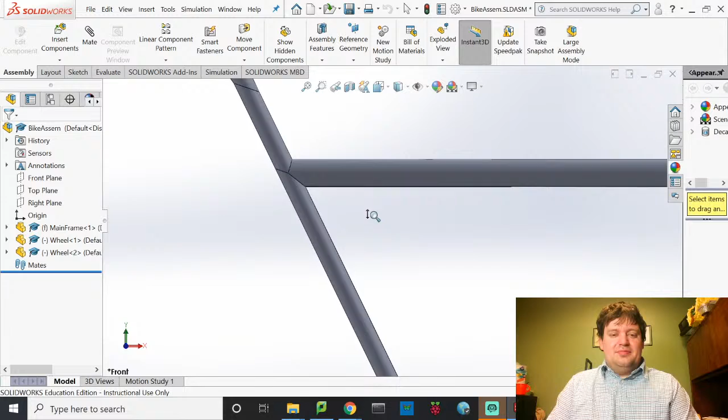Alright, in our last video, we started the design of putting together the final assembly of the bike. What you'll notice is that this doesn't quite look like a bike yet. I got my frame that I built, got my two wheels, and I did build a rear suspension in the last video. We're just going to keep going and trying to finish. We're going to connect this wheel today, and a lot of this is talking about different principles of assembly.

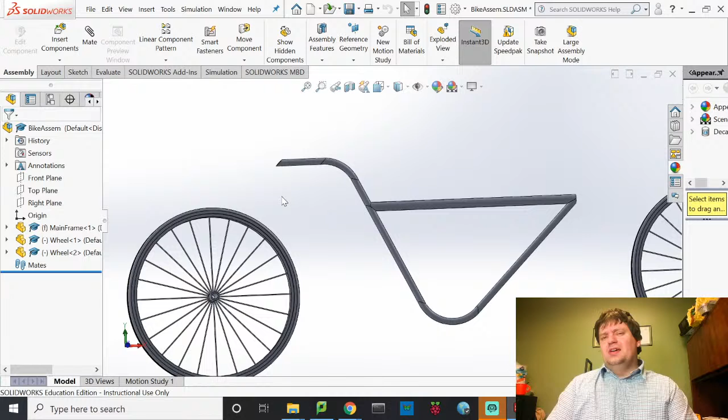When it comes to assembly in SolidWorks, there's a number of different ways that you can assemble things. You got to think about this like you were actually building a component. If you're going to build a component, in order to mount two things together, you would line up the bolt holes, and if they line up, you just let a bolt in. You would position it at a certain place and then clamp it on, maybe line things up and sandwich it between two other features, or slide it into a slot. You got to think about how things are assembled. The bolt holes are probably the simplest way to assemble things. It's what most people are used to. If you cut two holes in a component, you can align them very simply.

I did that a lot in the last video, and I also did a few other assembly techniques, like positioning a plate at a certain location. I positioned it, I think, 4 inches in from the end.

But when it comes to assembly as a whole, you always have to be thinking about how parts connect. One of the things I tell people very often in SolidWorks, and in design in general, is it's not hard to design a bar. I need something that goes from here to here. That's a bar, it can be square, it can be round, it can be whatever's available. That's not hard. The hard part comes in: how do I connect it? Connections are one of the most challenging parts of any design.

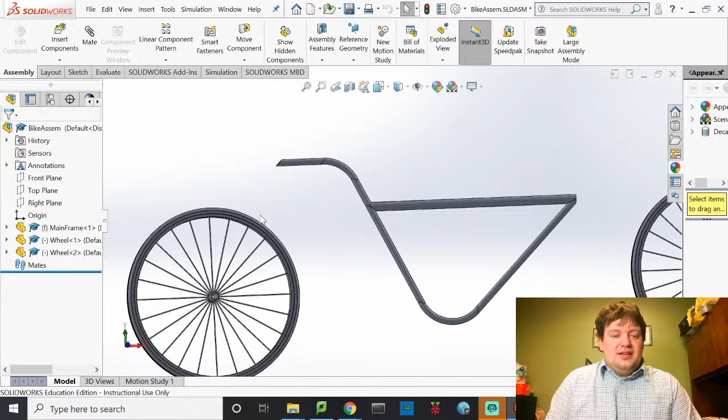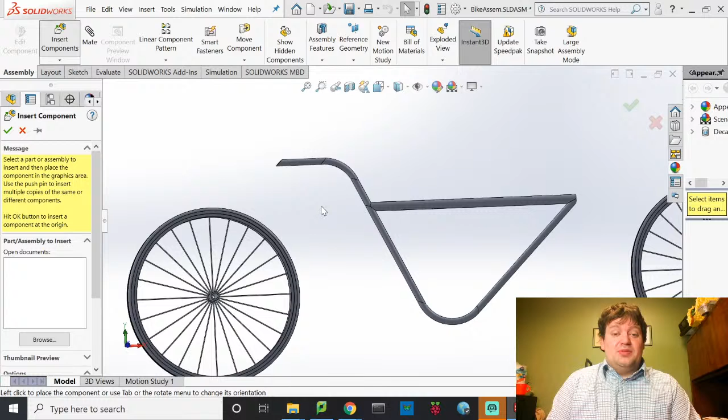So what I'm going to do is put my rear suspension in here, and I have a couple of different options for how I can include that rear suspension. Now, you'll notice last time we actually made all of these parts, but we also made this assembly file, which is the rear assembly file. Now, I'm in an assembly, but I can insert an assembly. This is now referred to as a sub-assembly, just by me putting it in here.

And you'll notice here's the center axle, and this is the axle that is used to rotate about, and this was my connection point that was going to go onto the frame itself. So what I'm going to do is mount that here, mount this piece here, and go through that process. So pretty simple, not terribly challenging.

You'll notice again that I do not have my temporary axes shown, so I won't be able to align my axes very well. So I go up to View, Hide/Show, and then go to Temporary Axes. This just allows me to see the axes so that I can get a better connection here.

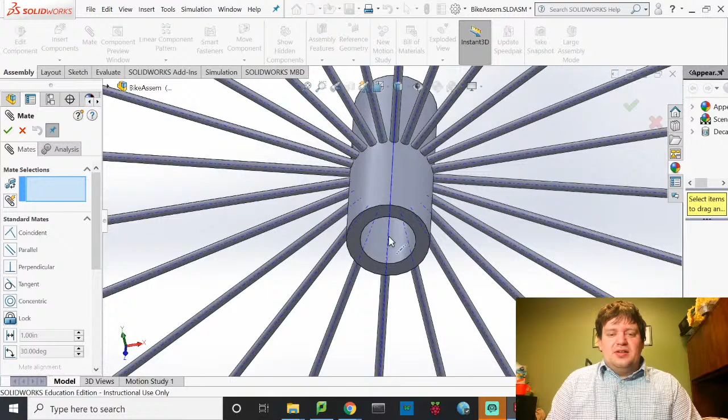Select an axis here, then hit Control, pan upward, zoom in by scrolling the mouse wheel, click this axis. You'll notice it just jumps right down in there, and that's where I want it to be, so I hit OK.

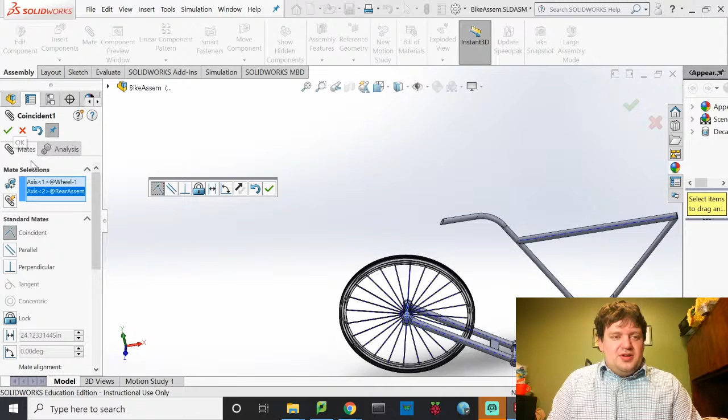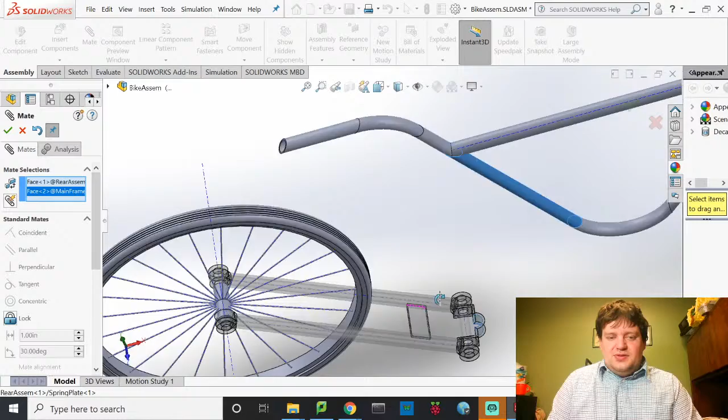Now the next piece is, I want the inside face of this piece to be in contact with the outside face of this piece. Okay, but you'll also notice that it didn't really do anything. The only option I have is lock, and that didn't quite work.

These circles are, I believe, slightly different diameters, and as a result, just connecting the faces is going to be impossible. So here we do kind of have to do some tricks to connect this piece to this piece.

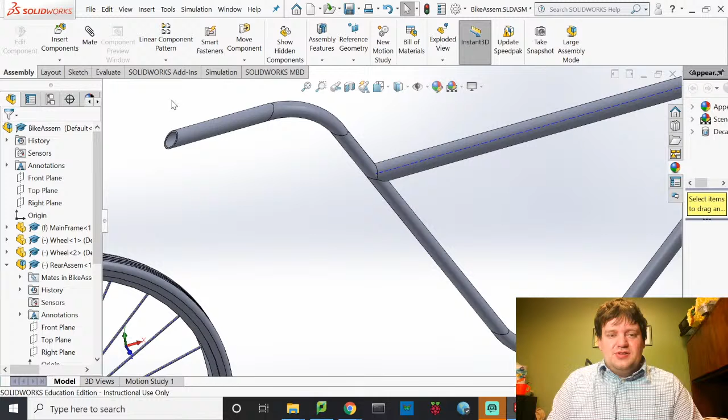You'll notice I don't have a display of my sweep line, which my sweep line was used to create this. This doesn't have any temporary axes. I can go in here and view planes, points, routing points, axes, and everything, and quite frankly, curves.

It's always going to be a challenge for me to try to get that point to match to that sweep that I created, because I don't have any flat points, and trying to mount a round object to another round object turns out to be actually kind of hard, which is where the temporary axes are kind of helpful.

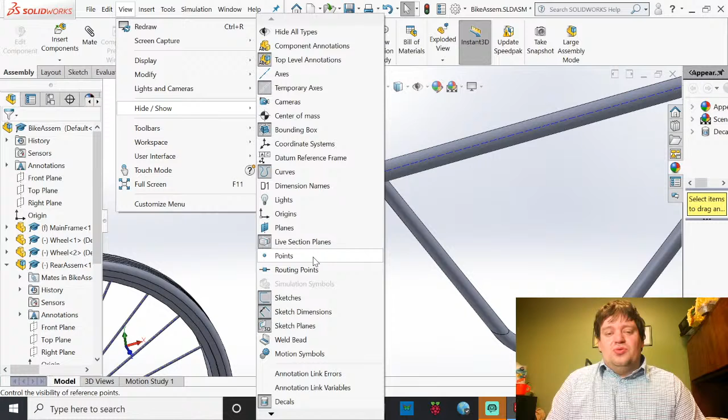So what do we do? There's a number of options that we can follow here. I mean, we have this temporary axis here, but we don't really have a line to connect to. So we could go back into the drawing and draw an axis that goes from here to here so that we can mount this axis to that one and just force them to be in line. That would be one option.

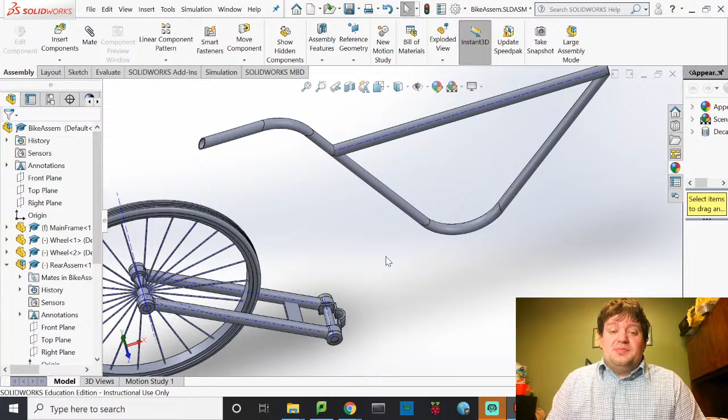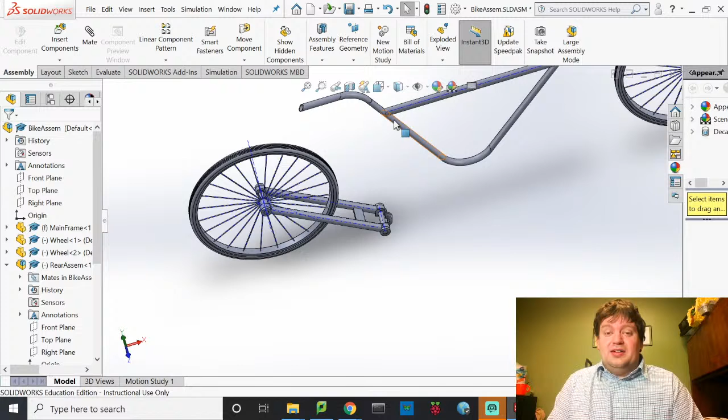Another option is we could create some planes and try to mount maybe this front plane surface to it. That would be another option. Third option would be we could actually drill a bolt hole in here, just a single bolt hole that would hold it on, and then drill another bolt hole in here, and mount it that way. And quite frankly, that's probably my favorite.

Holes are very easy to align, and I like the idea of creating holes. So I'm going to go ahead, and all I need to do is really open up that bracket. I don't need to open the whole assembly because that sub-assembly will also update when I fix it. So if we go to my mounting bracket, open it up, and all I'm going to do is add a hole so that I can connect that piece to my frame.

I'll also have to drill a hole in the frame. We'll get to that when we get to it. So here I have this. I'm going to go ahead and do a sketch, and I would draw it on this plane, but I don't want that plane to go away. Well, no, it doesn't make the plane go away. I'll go ahead and draw it on this plane. I'm just going to draw a circle in the very center.

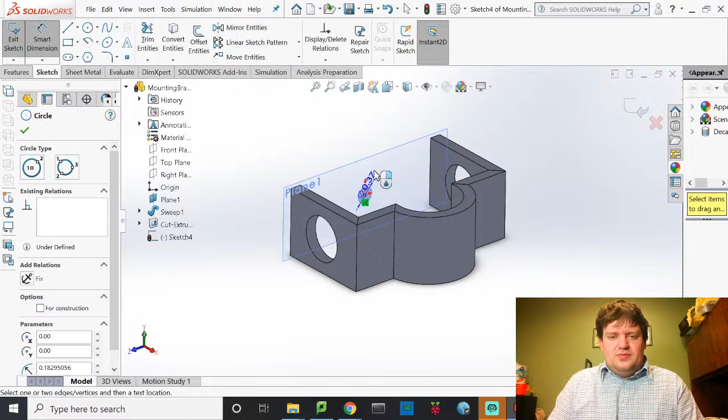Let's say we're going to use a 3/8 inch bolt. So define this as, oh, I almost got 3/8, 0.375, hit enter. You'll notice if I zoom in, it's fully defined. So I then exit sketch.

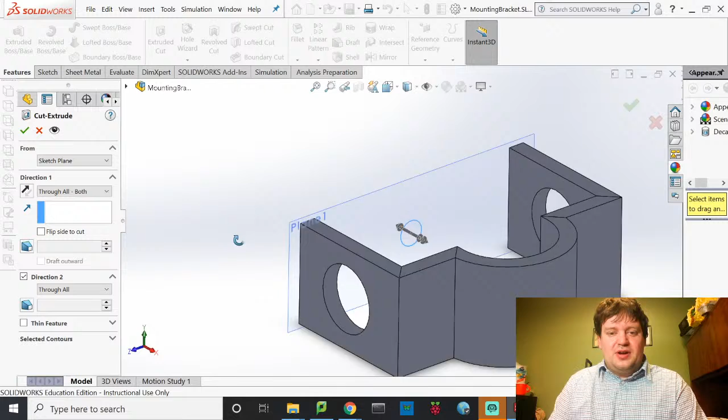And then I'm going to do an extruded cut through both, and hit OK. Oh, cannot rebuild, cannot locate end of feature. Can't find anything to cut. So there we go, I'll just do a through all. I don't have it, there's another side, there's no other thing to cut back there. And there's my bolt hole.

It's pretty simple. This is why I say bolt holes are the easiest. I'm not going to require you to put a list of bolts in here. In a full design, you would actually have to model like a tube or something and call it a bolt, put it in, so that you can get accurate part counts. I don't care about accurate part counts right now. This is not anything that matters to me.

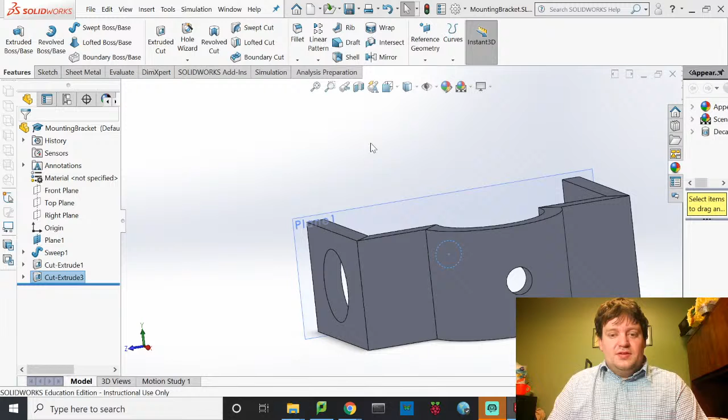I'm going to go ahead and open the frame. So pop open the frame. I'm going to go in here and I'm just going to select a place. Thank you, SolidWorks. To drill a hole. Now that's not nearly as simple.

I need it to be something that is parallel to this face, quite frankly, but I don't have a parallel to this face to go from. I mean, I've got this sketch, I got that line that I can draw from, and maybe I could select, I don't know, this line. Nah. What I'm going to do is go into this sketch, edit this sketch, and I'm just going to draw...

A line that goes from this point. Can't even select that point. Okay, well, maybe I'm not going to add a line from that point. Never mind.

Oh, I'm in the wrong sketch. That's why, that makes sense. This is the sketch I want to be in. Silly Kale. Tricks are for kids.

So what I'm going to do here is I'm trying to think what I'm going to do. I'm going to offset a line. And then I'm going to use that line to create a plane.

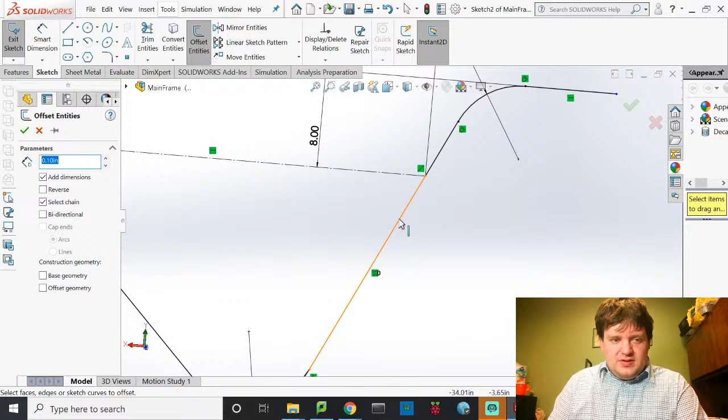So I will go in and where's offset? There it is. I want to offset. I'll set about 2 inches. Pick this line. Oh no, do it the other way. And hit yes. Now you'll notice it actually ends up selecting everything. It didn't just pick my one line. It picked the entire curve.

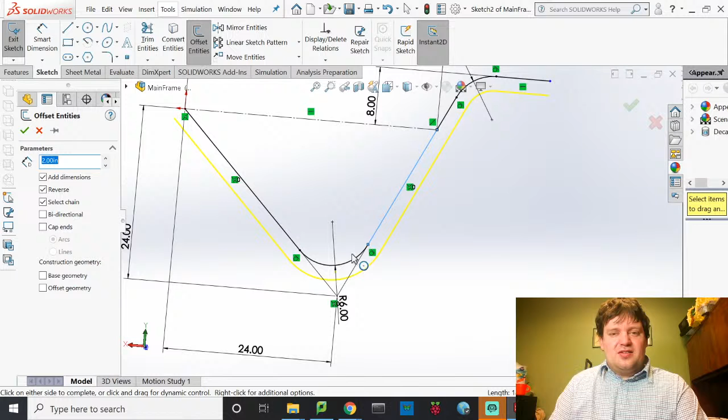Well, I don't want the whole curve. I just want that one line. Well, if I do this, I think I should be able to just delete all the rest of these. I don't need them. And then, quite frankly, this one I want it to be for construction, because it's only a line that I'm going to use to try to generate a plane. It's not even letting me do that.

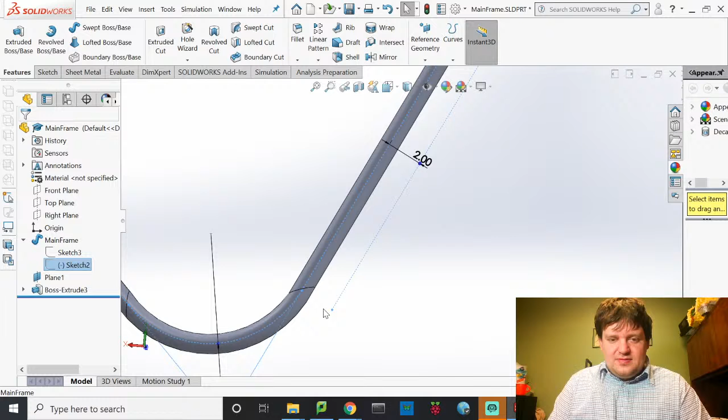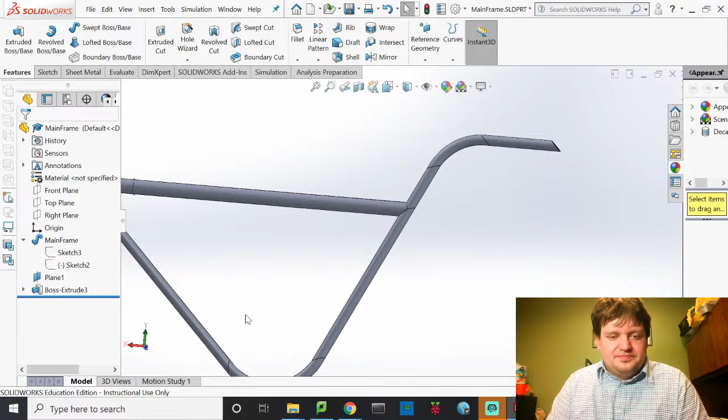Okay. Well, this is why it makes a great learning moment. Let's see if I can insert an axis in here. Try grabbing a cylindrical face and see if I can create an axis from that. Oh, it's not cylindrical enough, so SolidWorks says it's not a real cylinder. Nice. Okay. Well, drastic times call for drastic measures here.

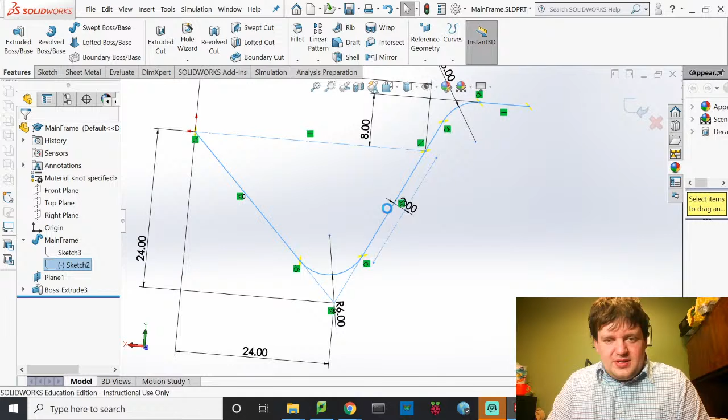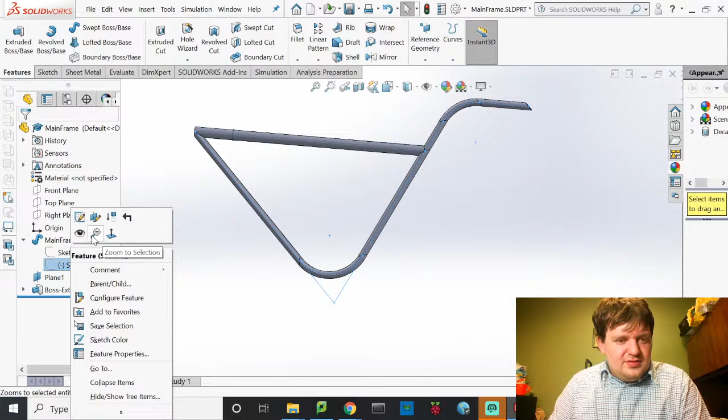I could try to create a face that's roughly perpendicular to that. Really want to select this line right there. I think what I might do is go back in, and that beautiful line I just created, it's not helpful. SolidWorks is going to freak out for a second. I think I can copy this. I can suppress it, I can edit it. Let's see if I can't just control copy, paste. Okay, so I get the exact same drawing if you just copy and paste it.

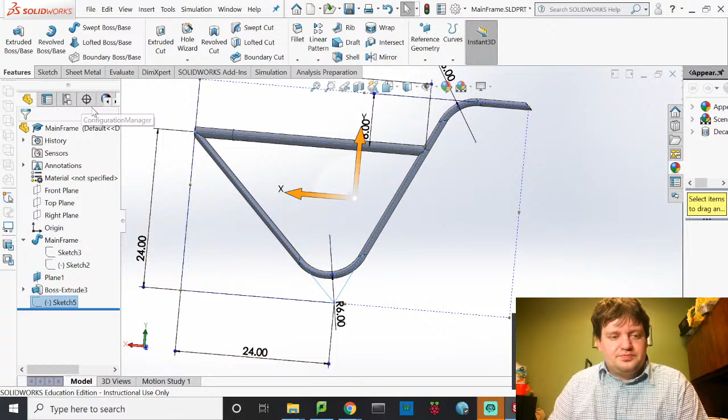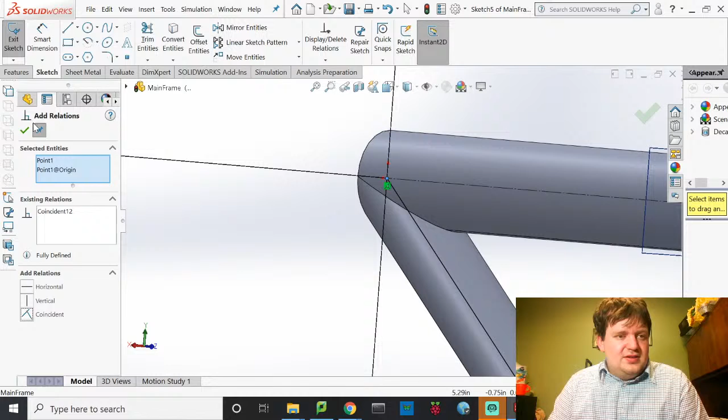And now I'm going to see in this one, thank you SolidWorks, you're a real hero. I'll go ahead and edit this sketch, and it doesn't have this point connected to the origin. So if I just go in and I add relation between this point and the origin, select other, point at origin, delete the line. If I just make them coincident, it will make everything fully defined.

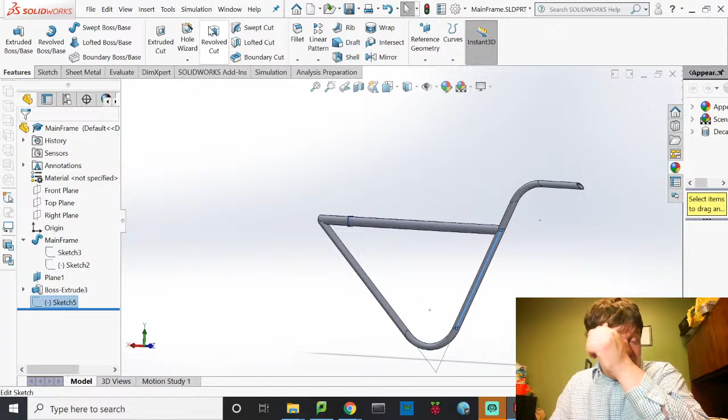Okay, now I need to try to use this line right here to create a plane. So we'll go ahead and exit the sketch. Notice I can still see some pieces of this line. This line now shows up. What I can do is I can click on it, hit reference geometry, and click plane. And what it will do immediately is say coincident, but that doesn't fully define it.

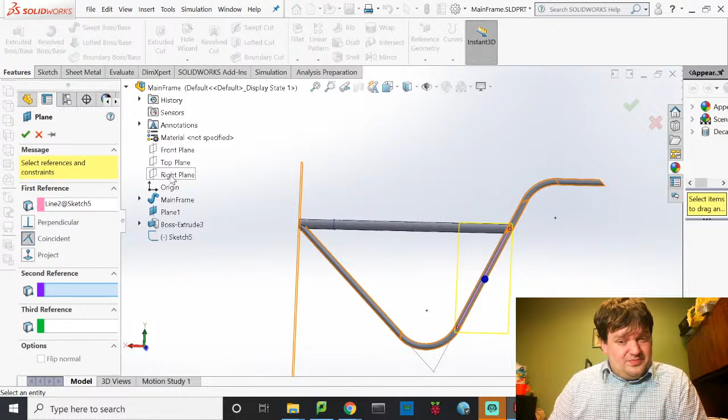What I'm going to do for my second reference is I'm going to actually select a perpendicular plane. So here I want my front plane to be perpendicular, and the moment it says perpendicular, it says fully defined. So now I have a plane that goes in the direction of this object, based on this sketch. Okay, and now I finally have something that I can draw on.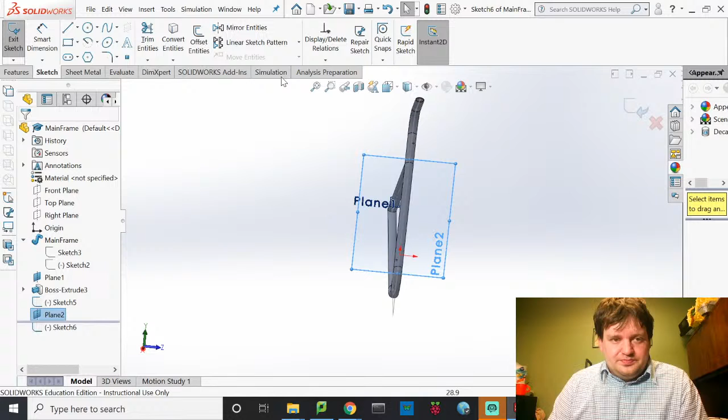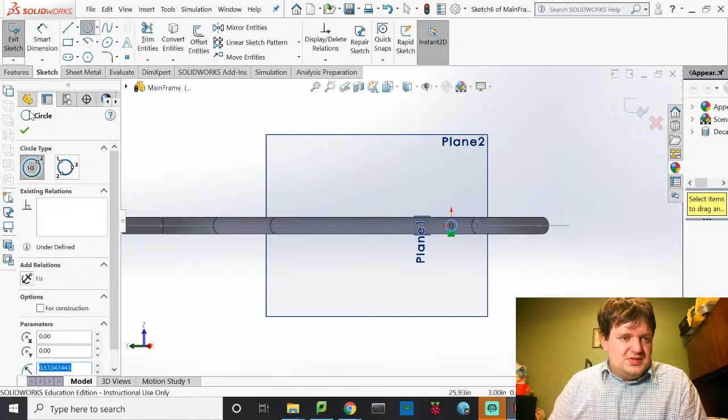So I'll go ahead and do a sketch, click the plane, and I'll go in here and I will draw a circle. I'm going to make normal to the plane. Going to switch directions because I don't like that one. There we go. And then I'm just going to make some hole, some distance. Right now I have it at the origin. I don't actually want it at the origin.

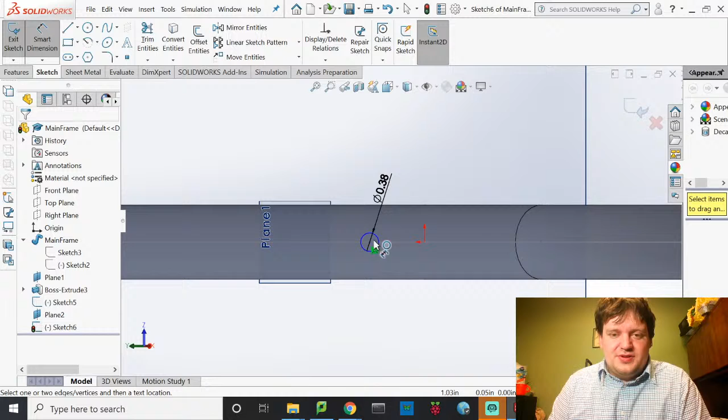Probably going to look at where the circle is going, but I do want it to be horizontal to the origin. So go ahead and smart dimension. We want this to be 0.375 inches. You'll notice it's not fully defined because while it is horizontal with the origin, we haven't picked where it's going to be on this bar yet. So right now I'm drawing it at the very bottom, which is not exactly where I would hope to place this object. I don't have any real indicator vertically on this of where to be.

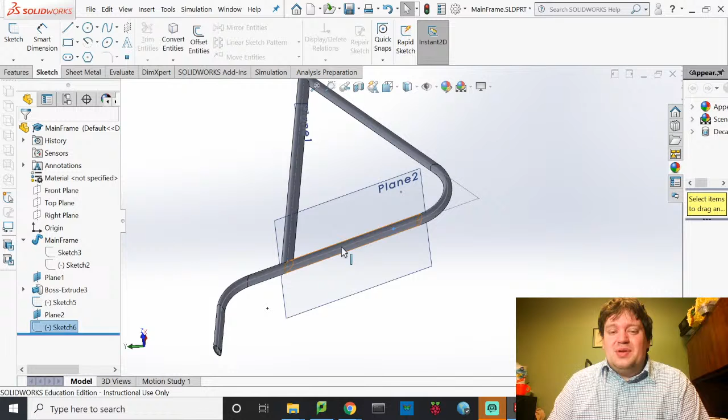So I could just draw a random dimension and be like, well, wherever SolidWorks placed the origin, I'm just going to move it up here some distance. I mean, that works, but that's not best practice. I want it to be about right here, which means I'm going to need some space away from this edge right there in order to place it. It'll probably go directly under that edge somewhere.

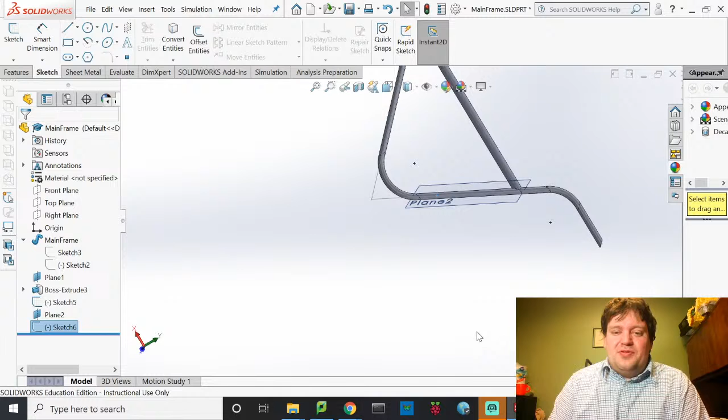So I'm a fan of having numbers that make sense. More than likely this hole would be drilled in the pipe before the pipe is bent, which unfortunately means that there's no rhyme or reason to, okay, it's this distance in from this end.

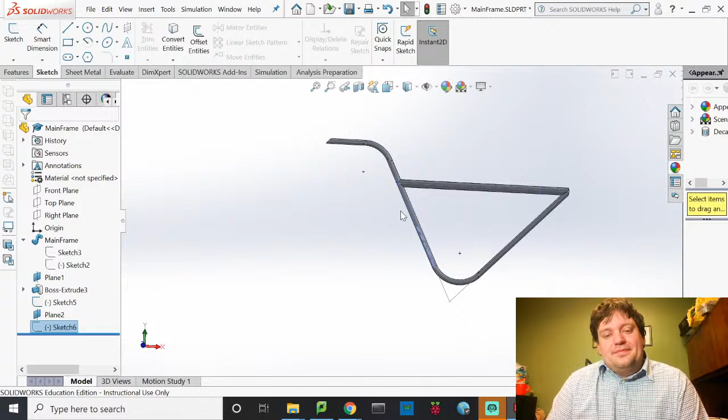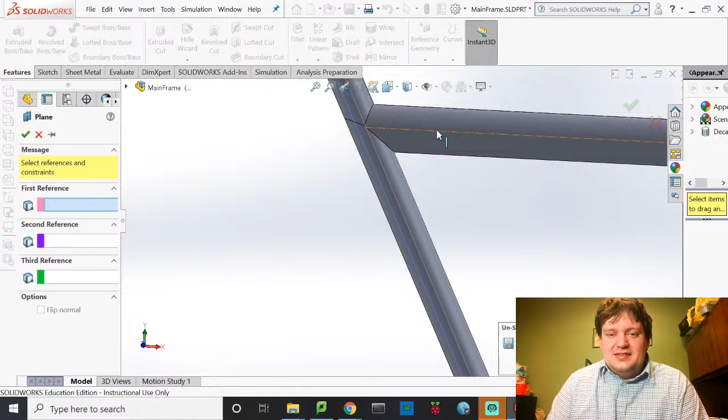It's not a very good measurement. So fortunately, there's no real rhyme to how we're about to do this. I'm going to go ahead and go back to features, create another plane, and this time I want my plane to be based off of this line, and I want it to be, oh nope, I don't want it to be based on that line. I want it to be based off of the top plane, and I want it to be a distance of 4 inches down. Yeah, something like that. So 4 inches below this bar will be my connection point. That sounds about right. I'll go ahead and hit yes.

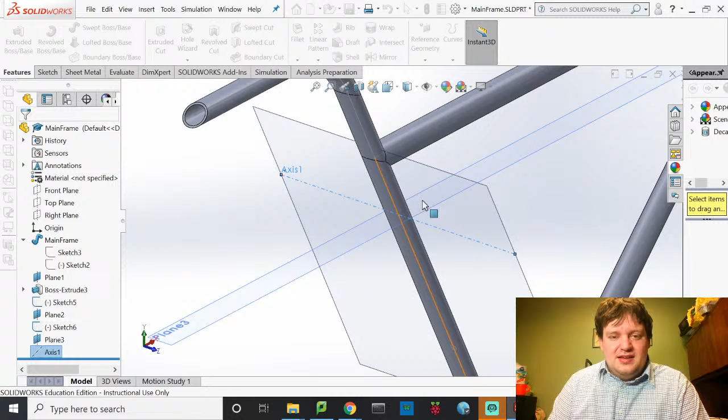And now you'll notice that I have 2 planes. Well, this plane isn't going to help me draw this, but I can create an axis. And it can be the intersection of 2 planes, forms that axis. If I hit yes, then this axis is formed. Now, as I'm drawing in this sketch, oops, exit sketch. Every time you draw a sketch, it hides everything that shows up beneath it. So what I'm going to do is I'm actually going to move these up above the sketch. Oh. Fine, I'm going to move this sketch down below. There we go.

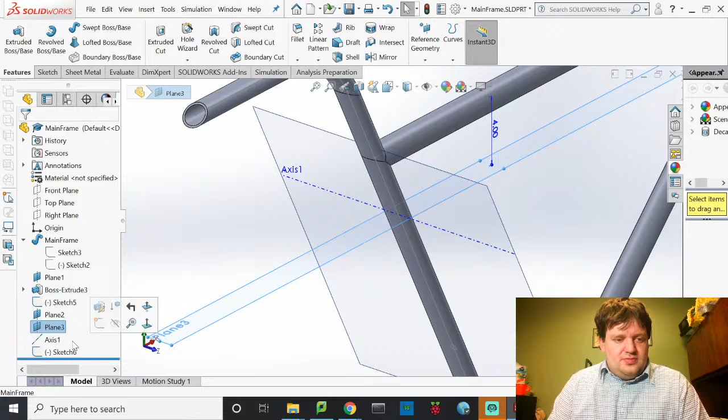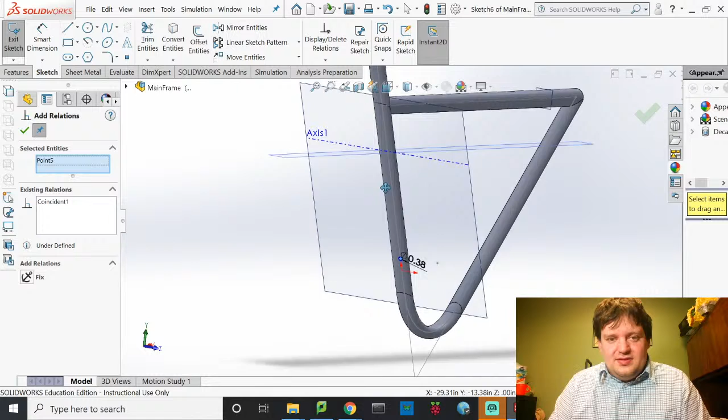Come on, SolidWorks. Okay, and now I can select this axis because this axis is in my plane. So what I'll do is I'll say, okay, I want center point of this. I'll go ahead and add relation. I want it to be on this axis. Make them coincident, and now that hole is fully defined. I'll hit exit sketch, and now I have a very peculiarly drawn, but relevant now, circle.

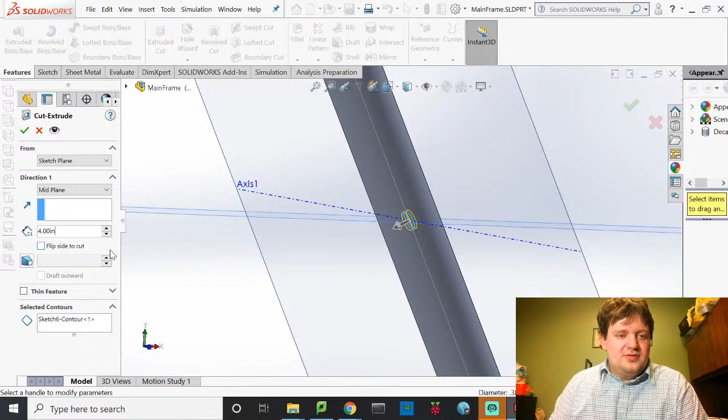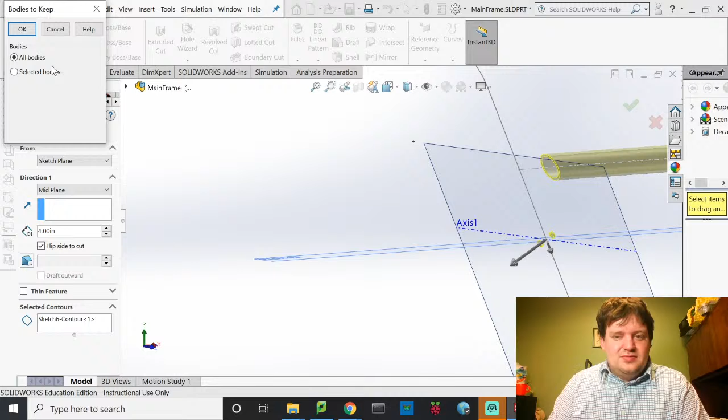So it took me a little bit to get there, but now we do an extruded cut, and I'm going to pick this circle, and I'm going to have it go mid-plane, and I want it to cut 4 inches. Okay, it'll go a little bit outside of this, but that's fine. I do want to make sure that it doesn't go and cut through the frame up here, because I don't want to have a weird bolt hole up there. But yeah, looks good to me, so I'll go ahead and accept. I want to keep all of my bodies.

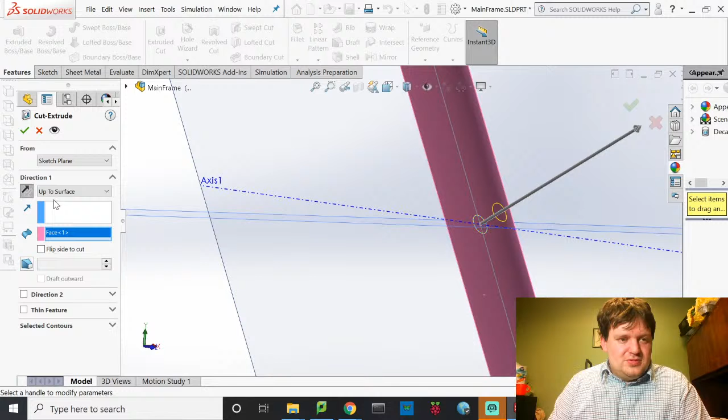Oh. Oops, for some reason when it made that cut, it decided to only keep what was cut. Let me try up to surface. No, I'm going to do mid-plane. I'll try 4 inches. And then there we go. I don't know what I did last time that messed that up. Now I've got a hole in here. And yeah, so I'm going to go ahead and save this.

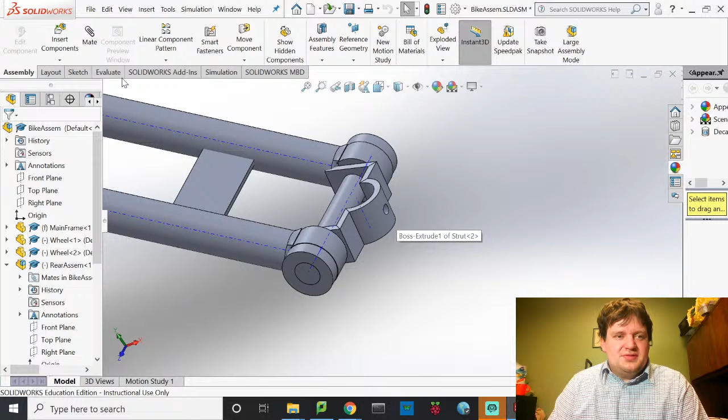Go ahead and jump back into my model. I did cut a hole in this piece here, and I cut a hole in here. So I'm going to just connect those holes. I still have temporary axes selected, so if I go into mate, nope. Preview component, I don't want a preview component. If I go into mate, it brings up my mate menu.

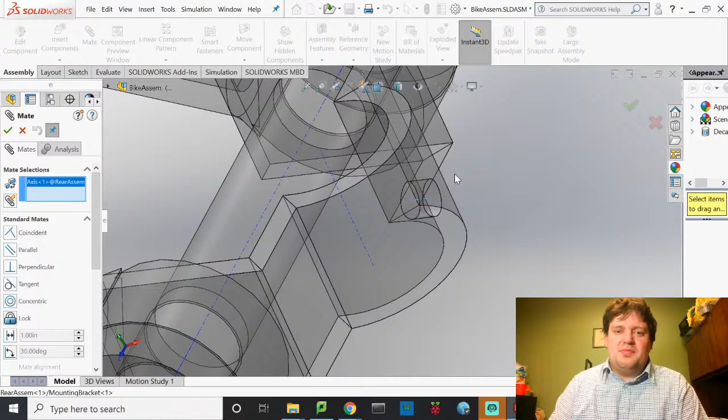Good day, mate. It's terrible.

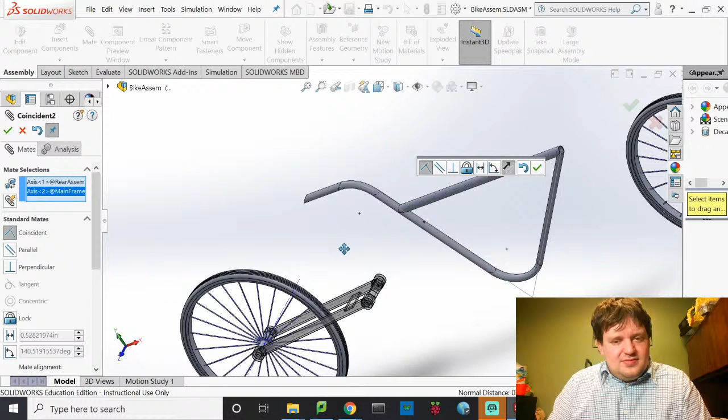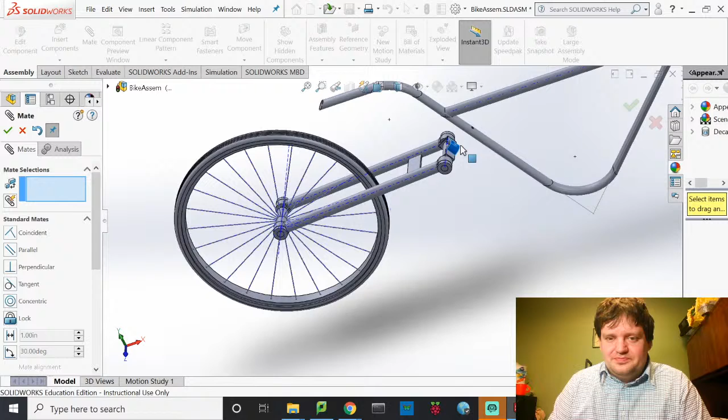Go up here, and I will select the temporary axis for this hole here. And all that's going to do is it's going to align them. So I will hit yes, okay, and that's awesome. Now I have this hole where this is somewhat in line with this. That's great. That's terrible. Oh boy. Now I do have this line that I just drew, and that line is the center line for that hole, so now I can mate those together. And you'll notice now there's a little bit of an intersection there. It's not enough for me to care about, but now I can actually have my components together.

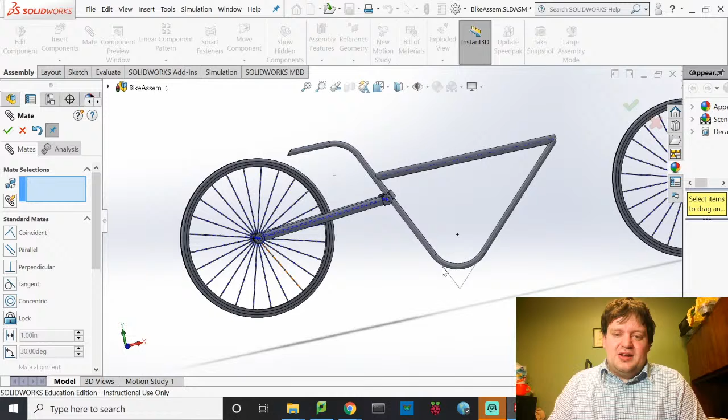Now the last piece is I'm going to have to mount a spring that goes from here. Nice spring. It's going to have to go from here to the bottom side down here. I won't do that in this drawing. That'll be another day, but I got my rear suspension mounted to my frame. The next piece of it is I'm actually going to build the frame out, create a connection for the front wheel, and then I'm going to work on all the intricate components, the gearing and everything. So making progress. I'm in a good place as far as the video goes, but still a lot more to do.

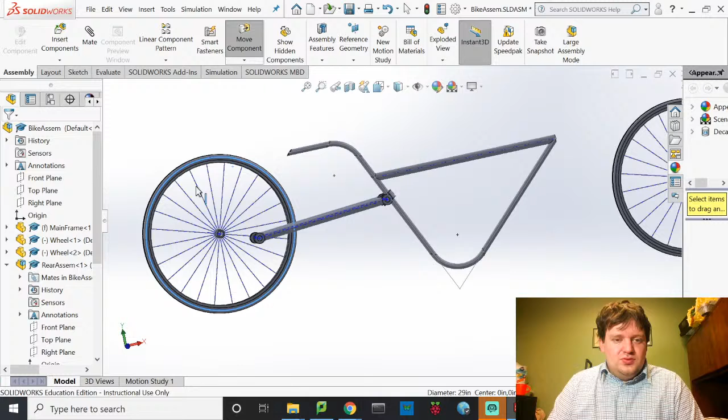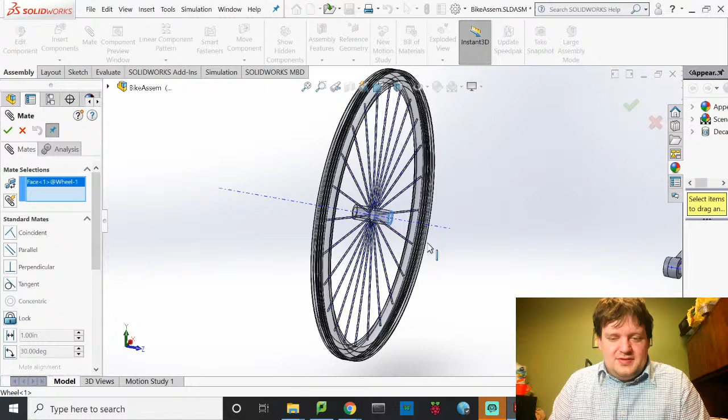Woo! Okay, that's a problem. I did forget to mate. I mated the axes together, but I didn't mate the face here. So, whoops. I'm gonna mate the outside of that face in with the inside face of this coupling. Sticks in there all nice. And now I should be able to, yep.

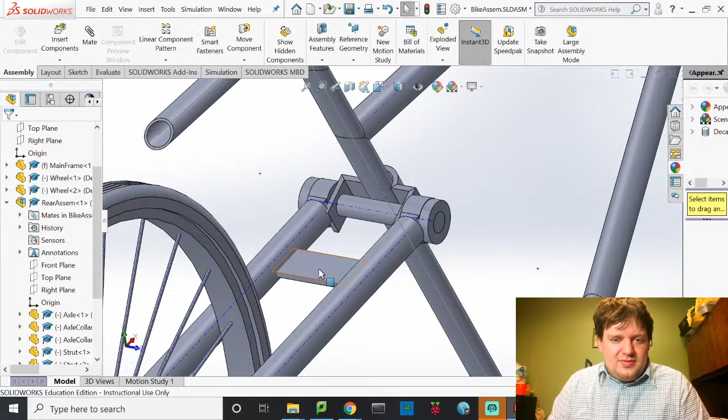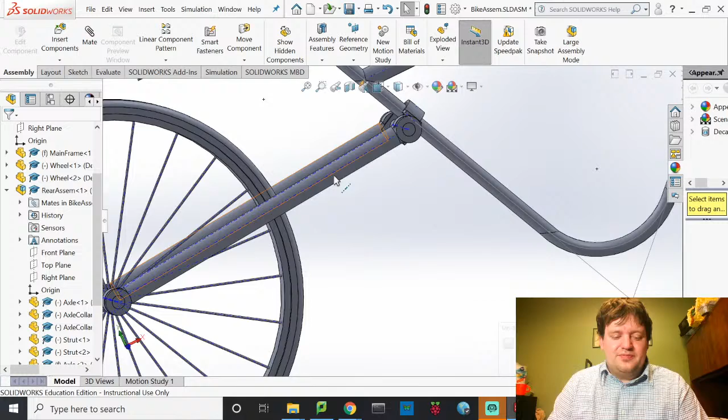Now I do not know why this is not allowing me to rotate this downward. It's supposed to be able to rotate. Everything I've done so far has aligned it so that it could rotate. I'll have to figure out what kind of mates are going on. I'll do that now, because I'm supposed to be able to rotate this component. If I can't rotate this component, I won't be able to rotate it into position so that it's appropriately aligned, so that I can mount the spring. So this, oh, I think the issue here is that my axle is fixed.

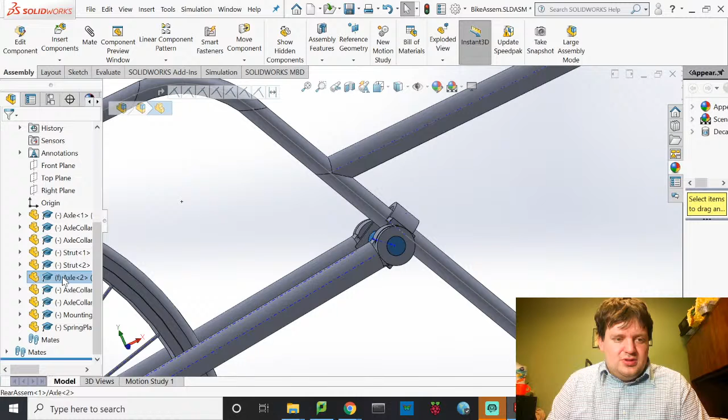Oh, that shouldn't be an issue. But I'm going to go ahead and change this to floating and see if that floats. No, it shouldn't make it an issue. For some reason, it is making it an issue. I can't even rotate the wheel back here. Oh wait, yeah I can. Yeah!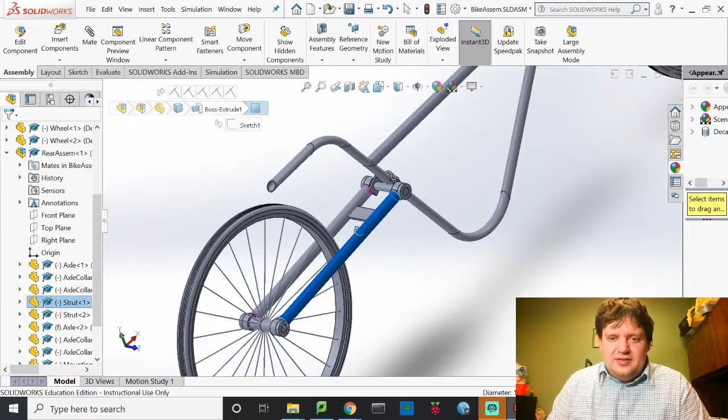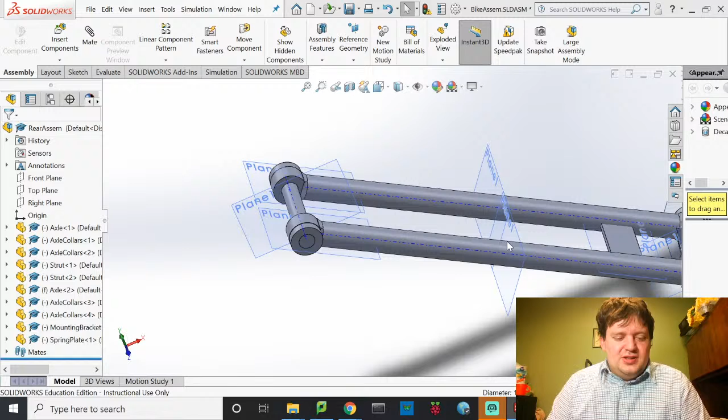But I should be able to rotate this strut. And the strut not being able to rotate, that is a problem. So, where in here did I accidentally prevent this thing from moving? I'm going to go back into my other assembly, a rear assembly, and I'm just going to see in my rear assembly, do I have the ability to rotate? Yes. Do I have the ability to rotate that bracket? Okay. And I do. The bracket rotates independently of the system. So that's not really my problem.

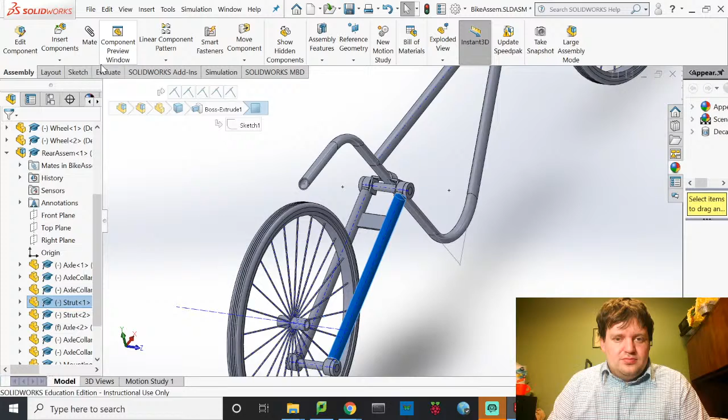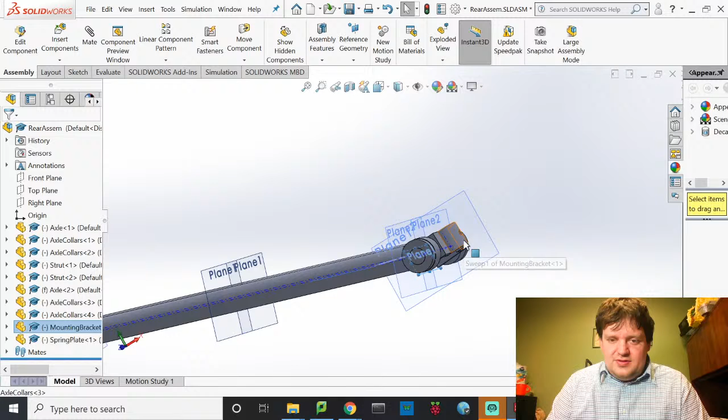I must have done something in the actual bike assembly. Oh, it allowed me to rotate that. It's interesting. I suppose I should probably try to rotate this into a nice position where I want it. SolidWorks is going to play that game. There we go. A little bit closer to what I want. Apparently you can't adjust positions of assemblies inside of assemblies. I didn't know that.

But I still need to mount that spring here to here. Now you'll notice this distance is pretty huge. It's a little bit bigger than my spring. So when I go to insert components and I go pick my spring, my spring's a lot smaller. I'm either going to need to make that spring a lot bigger, or I'm going to need to actually create a component to connect it. Okay. I'm probably going to just make the spring huge. Because you know what, I don't have to design this well. So that is what I will do.

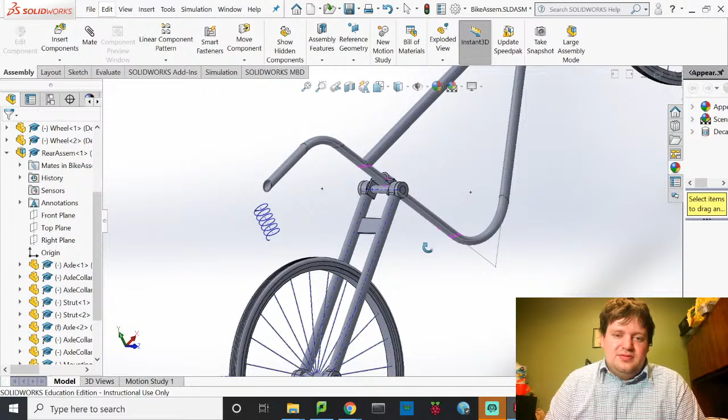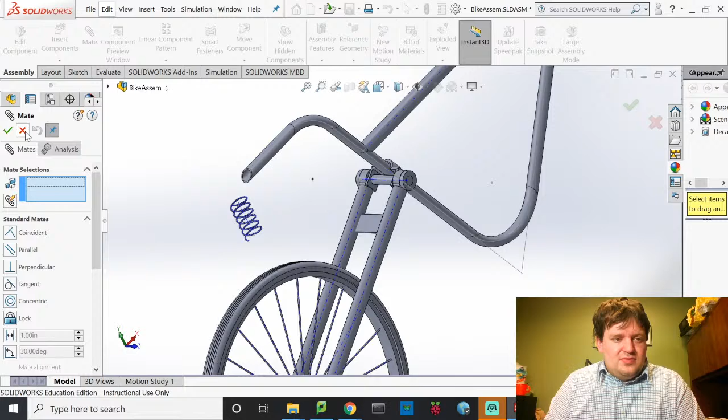I'm going to try to make this plate and this line here be parallel. Let's see if it'll make it happen. Doesn't appear to be making that happen. Yep. Was not able to do it because it's not letting me rotate this rear assembly in this drawing. I'd have to go into the other assembly and do it. I will deal with that in the next video though. For now, I've got this mounted. I just need the spring to connect it to the seat, and then we are golden.

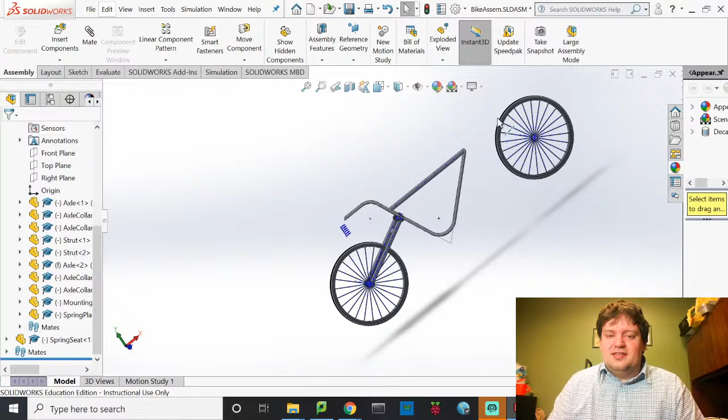So I will see you in the next video. What we might need to do in the next video is we may actually just need to go ahead and remove this bracket from this assembly. Actually, I'm going to do that. I'll do that in this video. We got a few more minutes.

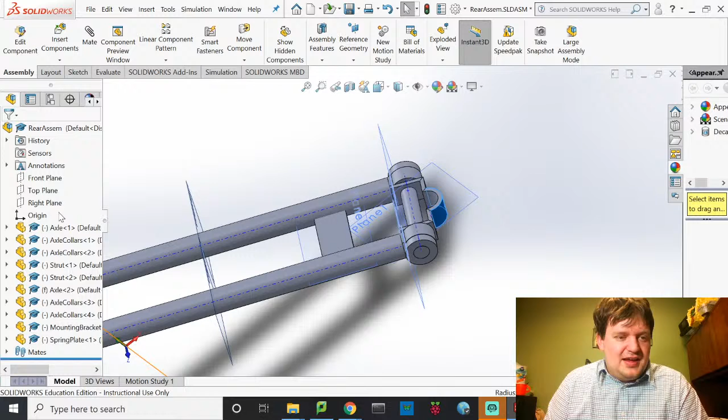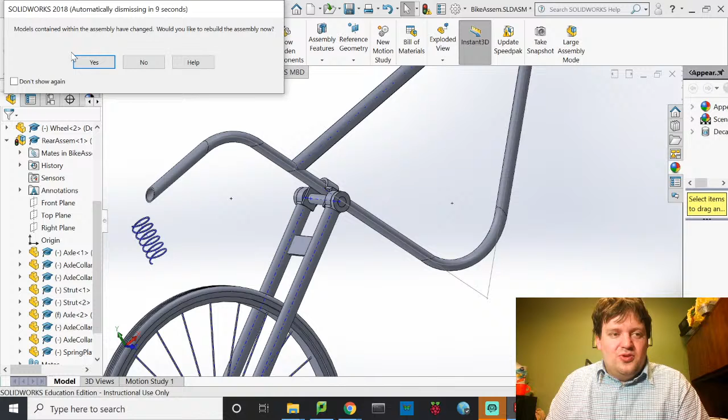So, going back in here. Now this is going to make SolidWorks freak out, because SolidWorks does not like this. It's going to hate what I'm doing. Got my mounting bracket. Hit delete. Delete all mates. Just makes it the rear assembly now. File, save, and then when I go back in here, it's gonna go, whoa, what the heck did you just do? And there goes my mounting bracket, as well as all of the mates that were associated with it. Now I can move this piece.

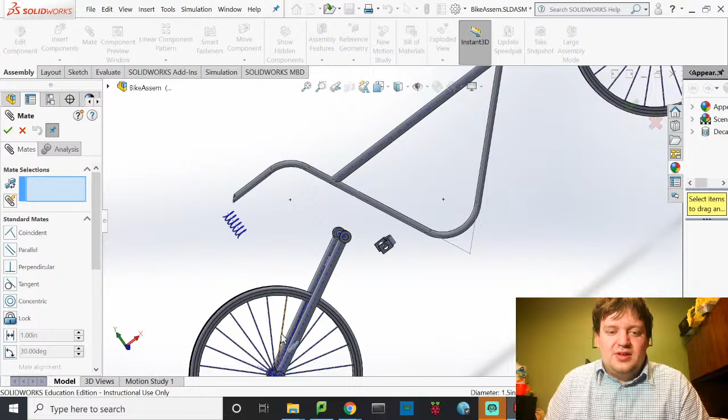So I'll go ahead and file, open, nope, not open, sorry, insert components. Mounting bracket, go ahead and put that right there. And then the process is very much the same. Because I can't really move this assembly, I don't really want to. I'm just going to make sure that this hole is aligned with this hole. We'll update and move the bracket into position.

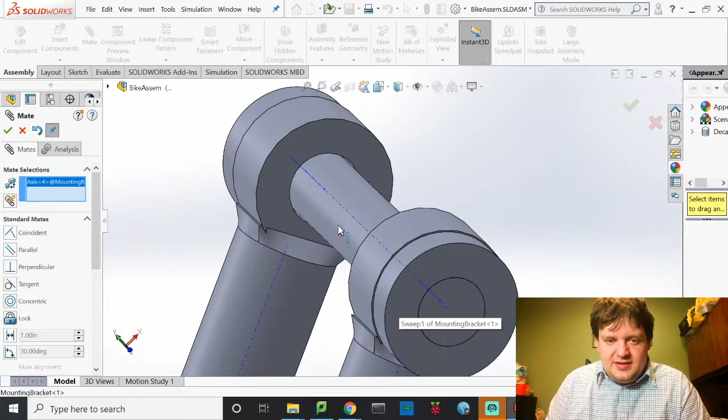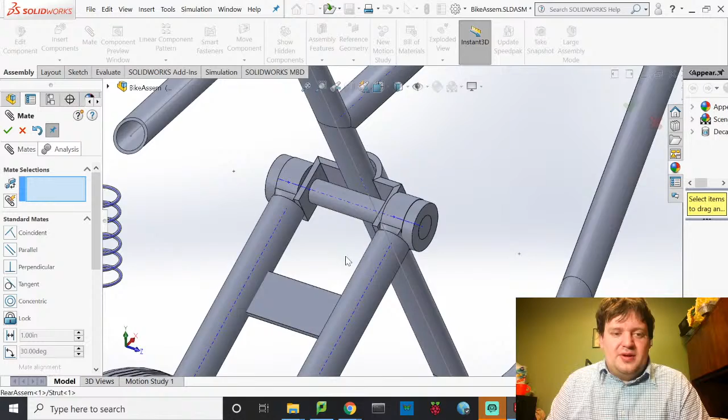And then I want this axis to be aligned with this center line. And then I want this axis to be aligned with this one. And lastly, I want this outer face to be mated with this inner face. And I hit yes. Okay, so I got all of my mates back.

And now what you'll notice is that because this is all one rigid piece, because it's an assembly, now I can actually rotate it relative to the bike frame. So there we go. Now the next step is putting in the spring. I'll just make that spring friggin' huge. We'll go from there. So, okay, that's it for this video.